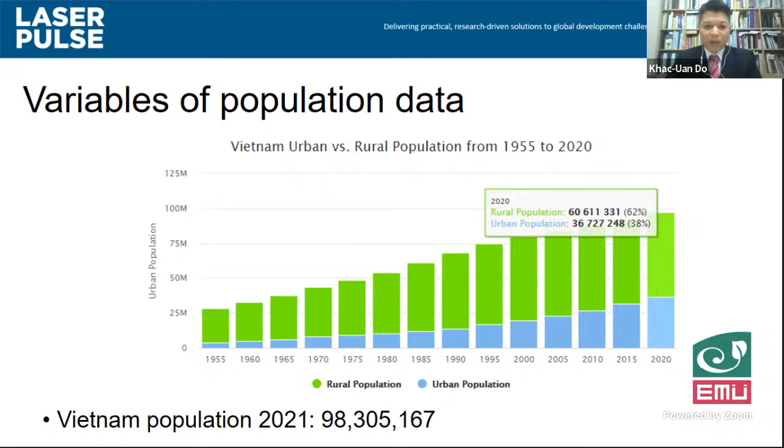The question is that because of very huge demand for water use, what is the situation for wastewater, and how it was treated and how it can be disposed of in the environment. But let's look back to the history.

You know that in Vietnam, our farmers have very high experience in using wastewater in agriculture, because more than 100 years ago they have used it for plantation, for fishery, for agriculture, or even for rice and vegetable cultivation, at a small scale or maybe a large scale. In some areas of Vietnam, especially rural areas, wastewater has been considered as a source for agriculture, and they use it through many kinds of models such as biogas or VAC models, meaning gardens, fish ponds, and livestock combined.

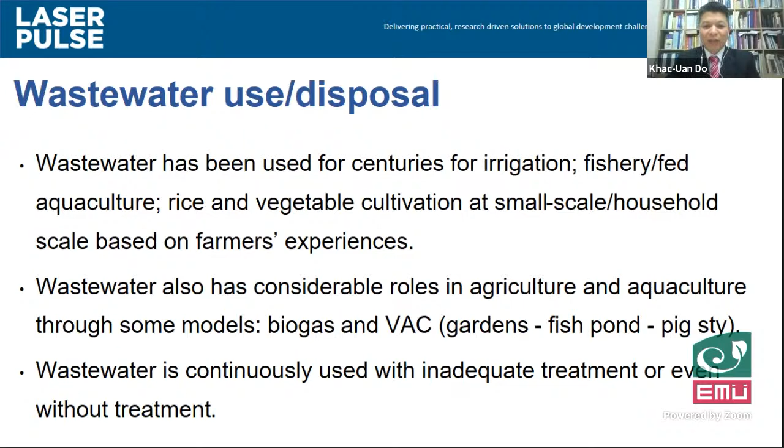And until now, wastewater continues to be used in some areas because we are lacking wastewater treatment plants, and even in some areas where we have wastewater treatment plants, the treatment efficiency is not quite good now. So that is why farmers in some areas have used wastewater for their activities, especially in agriculture.

Another reason why wastewater has been reused in Vietnam is because farmers think wastewater can be used since it is a reliable source and very cheap. Moreover, wastewater can contain nutrients such as nitrogen and phosphorus, which is helpful for plantation, so it can somehow save fertilizer for agriculture, and of course save money for the farmer.

So that is why in some areas people still prefer to use wastewater directly for agriculture. Using wastewater can save some water supply. However, using untreated wastewater gives risk for people and the environment, because it can contain pathogens that will be available in products shown in the market, and then the customer will be affected as well.

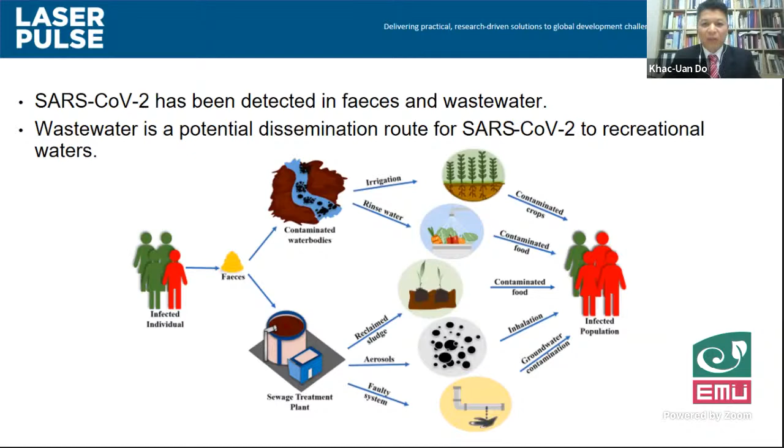Compared to the wastewater situation in Vietnam, you know that most people in Vietnam are living in rural areas, with the remaining living in urban areas. However, in Vietnam, most of the big wastewater treatment plants have been constructed in the urban area. So in this talk, I will focus on urban wastewater management in Vietnam.

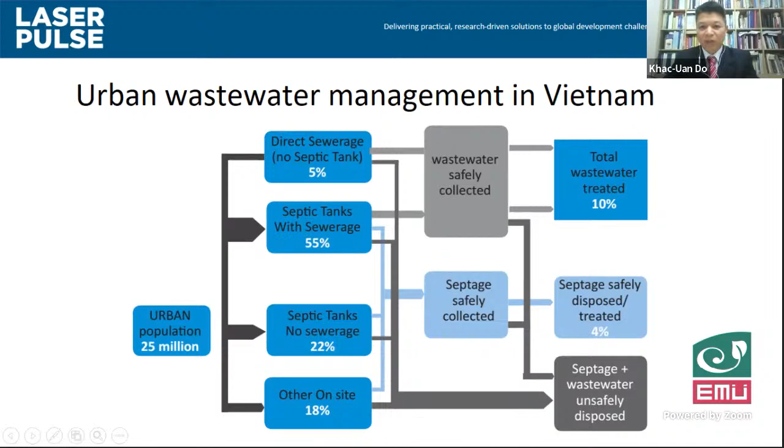It means that people in Vietnam in some areas have been using untreated wastewater for their activities.

Here is a diagram showing the very popular combined drainage and sewage system in Vietnam, used in most cities. As you can see, all of the wastewater from houses, high buildings, other services, and even from rainstorms is collected into the combined system, and finally it goes to the treatment plant. After treatment, it goes to the receiving water.

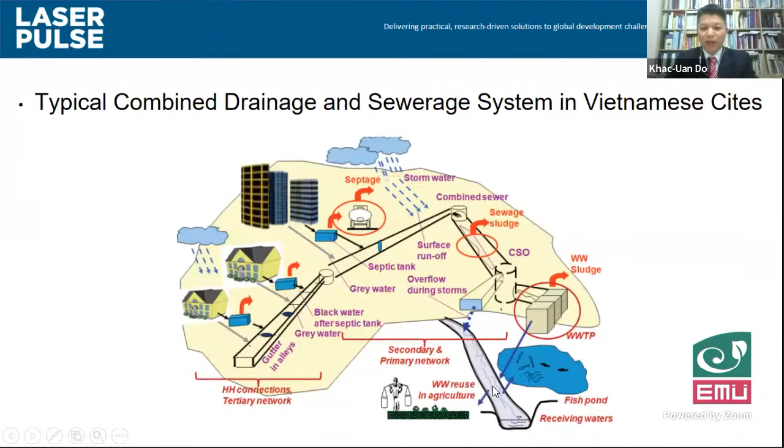The receiving water is mostly rivers, lakes, or reservoirs. Then the water there is taken for agriculture and other activities by people. Since only 10 or 13% was treated, remaining untreated wastewater also comes to this kind of receiving water. So using the water here may be low quality or somehow high quality, depending on the area that receives treated or untreated wastewater.

The reason most wastewater in Vietnam was not treated is that wastewater treatment plants were only constructed in big cities. Until now, around 43 urban wastewater treatment plants have been constructed in big cities such as Hanoi, Ho Chi Minh City, Da Nang, Quang Ninh, Vinh, and others. The total capacity is over 926,000 cubic meters per day.

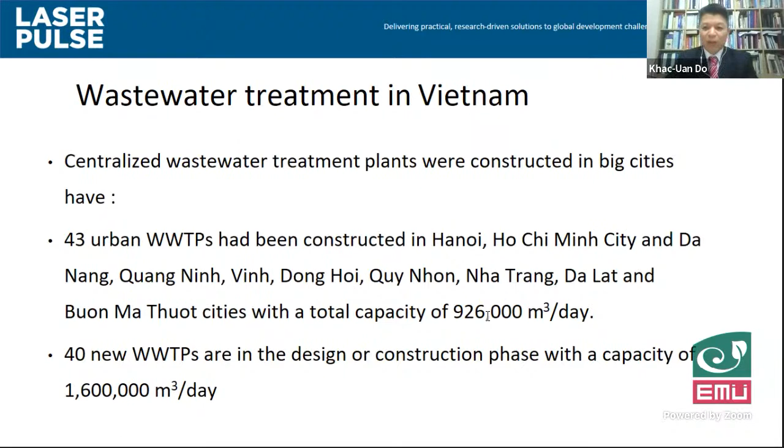Luckily, we have 40 new wastewater treatment plants under design and construction, which will increase the total treatment capacity up to 1,600,000 cubic meters per day. This will also help increase the percentage of wastewater that can be treated.

Because most wastewater in cities was treated in big wastewater plants, I wish to share with you the situation of centralized wastewater treatment plants in Vietnam.

This is a result from a World Bank evaluation conducted in 2013. It shows results for 15 plants, and you can see that most of the actual wastewater coming to the plants was much lower than the design capacity.

For example, in the case of one very big wastewater treatment plant in Hanoi, number 4, the design capacity of this plant is around 200,000 cubic meters per day, but the actual wastewater coming to the plant is only around 120,000 cubic meters per day. This means only around 60% of the plant's capacity has been utilized in operation.

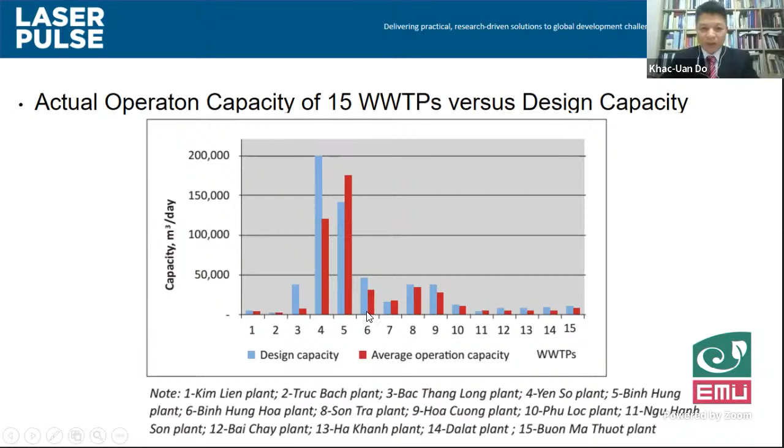This is information regarding the influent and effluent of some parameters treated in 15 wastewater treatment plants in Vietnam. First, it's important to show that in Vietnam there are two kinds of sewage systems. The first and most popular is the combined sewage system.

For example, in Hanoi, Ho Chi Minh City, Da Nang, and Quang Ninh. Interestingly, we also have a separate sewage system, which works in Da Lat, as well as in Buon Ma Thuot. So what is the difference between the two systems?

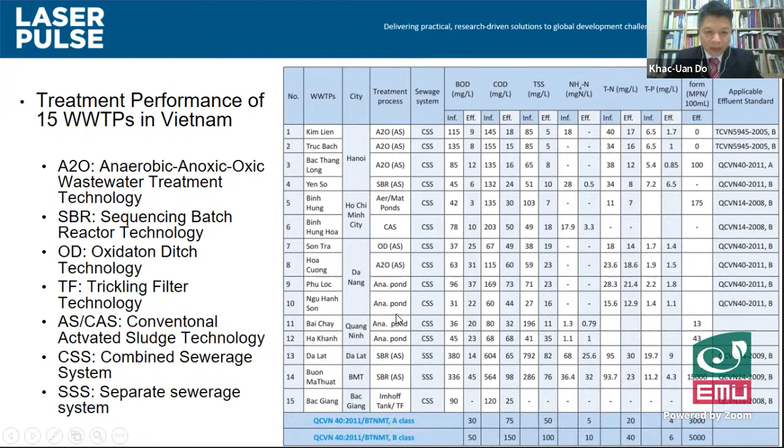And you can see that when we construct the wastewater treatment plants, the main aim is to have the wastewater in the effluent meet the national regulation. For example, in case of domestic wastewater, we apply the national regulation number 14 issued in 2008, and in this regulation, some values of parameters such as ammonia, nitrates, or phosphates will be about 10, 50, or 10 milligram per liter respectively.

So it means that most of the treated wastewater only goes through the environment to the receiving water, and we did not make the aim of reusing the treated wastewater here. Besides that, because of the nitrogen and phosphorus in the influent is not treated effectively...

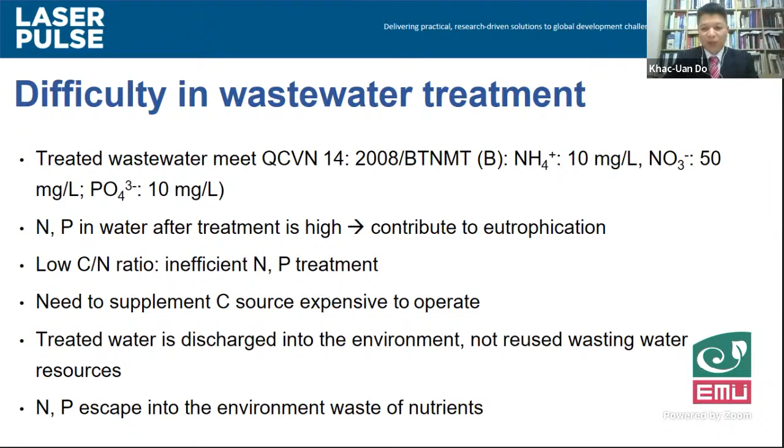And it is an ongoing project, and hopefully very soon we will make a small treatment plant, and we can have some data to show you later on.

Because this is a big issue in Vietnam, we need to review the policy for our wastewater treatment plan. Luckily, in Vietnam nowadays we have improved laws regarding the environment. For example, the law on environmental protection was first issued in 2005, and last year it was improved and updated to a new law of environmental protection. Besides that, we also have a law on water resources. It was first issued in 2012, and it was updated last year, 2020.

And all of those laws encourage reducing, and also encourage collection, recycling, and reuse of waste, including treated wastewater. They also encourage technology for treating and recycling the waste, including wastewater, even at small or big scale.

One important thing is that urban wastewater must be treated effectively by means of increasing more big wastewater treatment plants in the city first, and slowly it will be built for the rural area. Wastewater is not allowed to be reused because they mention that the effluents must be treated efficiently. Whenever they meet the national regulation, then it can be reused for other purposes.

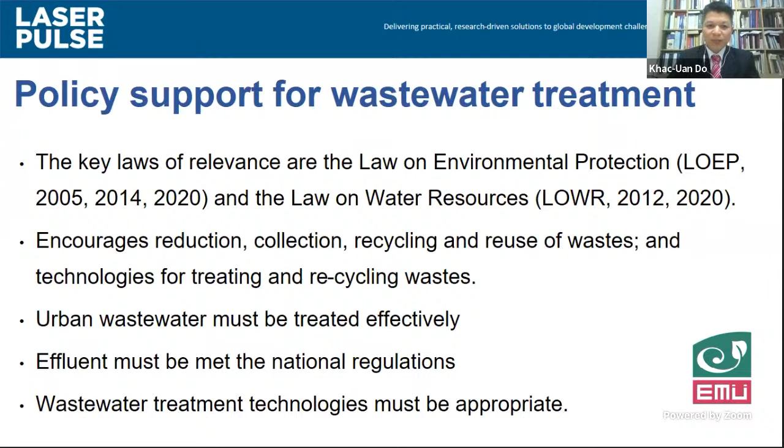Finally, actually in Vietnam now we are confusing the terms. Somewhere they use wastewater reuse, but actually by the law and by many documents regarding the environment, wastewater is not allowed to be reused, but the treated wastewater can be reused. So here we need to make sure, otherwise people may be confused.

And it is obvious that once the treated wastewater is reused, it can serve as a reliable water source. In other words, it can save fresh water. It is obvious. And also, in case of reusing wastewater, it can help to reduce the pollution of the receiving water.

Besides that, treated wastewater can contain some useful nutrients. So nutrients from the treated wastewater can help to reduce some kind of fertilizer for agriculture. Anyhow, it may open a large chance for environmental technology.

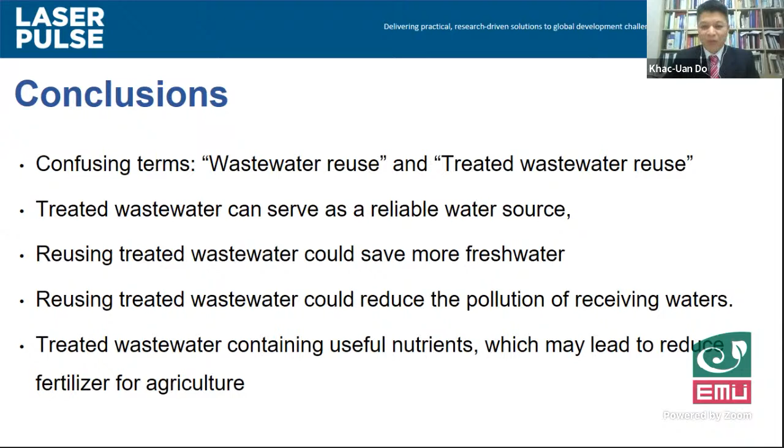However, as I mentioned above, to apply this concept in reality is not easy at all. It should start from small work first. That is why we are conducting some research work in this direction, and hopefully very soon we will have some good results and more data about this topic. Then at that time we may have another chance to share with you.